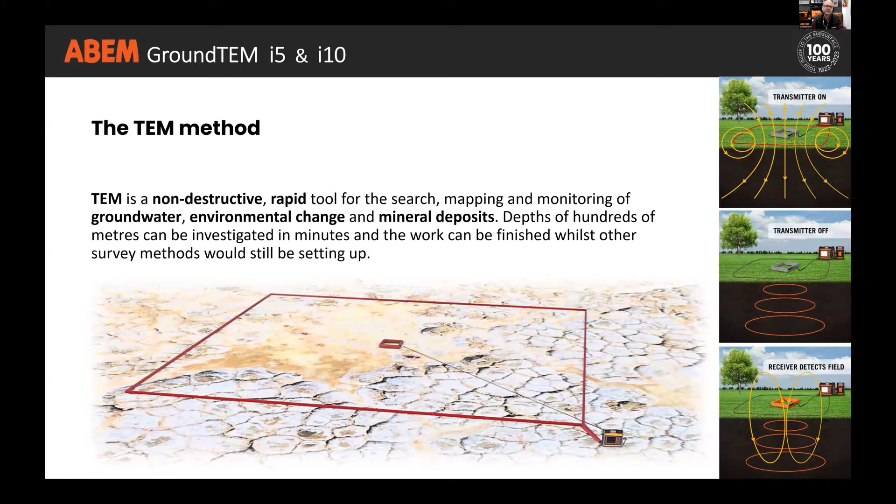So productivity is where TEM really stretches its legs, as well as its ability to map conductive bodies very well. When you're collecting 1D data, i.e. getting a model of resistivity against depth, there are quite a few limitations in that method and assumptions we have to make about what's happening in the subsurface around us. So if we can do more 1D soundings in a given time frame, we'll have a better picture of what is really happening with the geology and hydrology beneath our feet.

All TEM systems primarily consist of some way of transmitting, some way of receiving, and an instrument to record the signals. With the center loop configuration that we use on the WalkTEM 2 and on the GroundTEM, we have a transmitter loop around the outside, a receiver coil at the center, and the instrument generates a signal to go around the transmitter loop and records the responses that come back through that receiver coil.

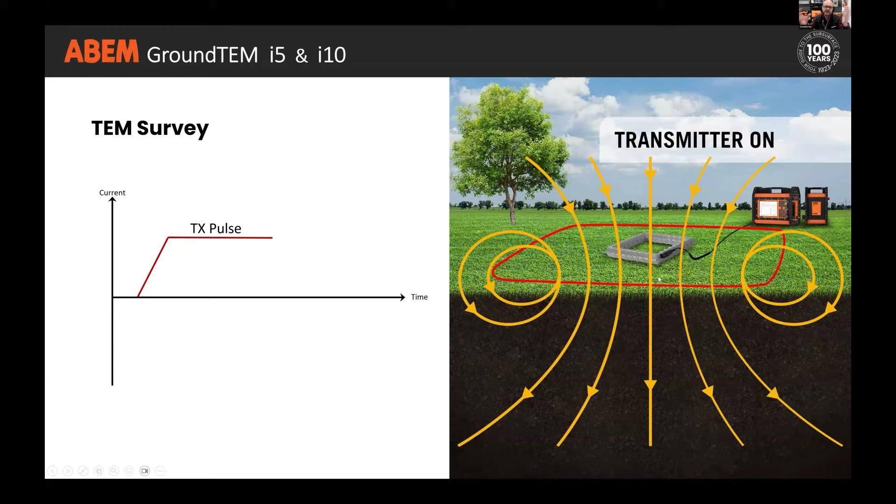What we do with the system is run current into the transmitter loop. We switch current on and wait for it to stabilize, and then leave it in that stable state for a short period of time. Physics textbooks tell us a wire carrying a current will generate a magnetic field around it - that's what we're trying to represent here. Red is the transmitter loop carrying the constant current, and yellow is the magnetic field that has been generated around it. We then switch the current off incredibly quickly, and that magnetic field collapses.

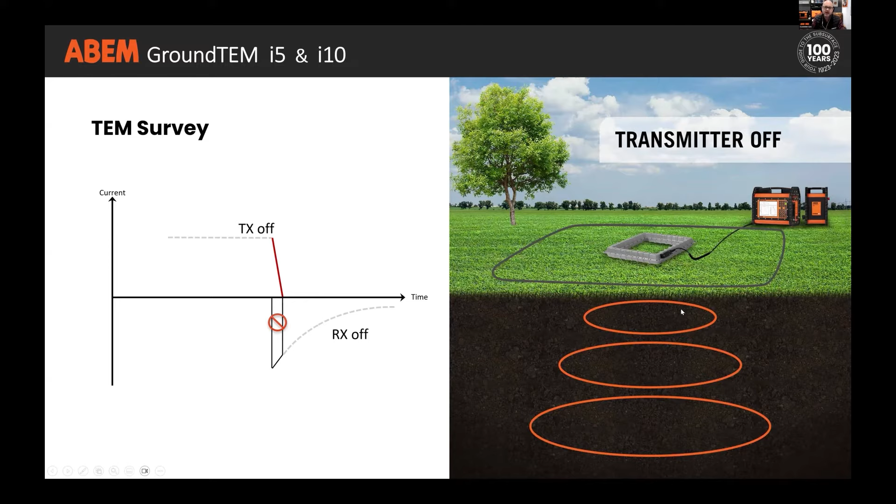As it's collapsing, it generates eddy currents directly beneath the transmitter loop, and these eddy currents spread out and downwards - a bit like smoke rings into the ground. Because they are a flow of current, they are also generating magnetic fields, and it is those magnetic fields that our receiver coil back at the surface is picking up. As the eddy currents, the transient, get deeper into the ground, the secondary field becomes weaker, and it is that decay that we map. The way it decays tells us something about the conductivity, the resistivity of the ground beneath us.

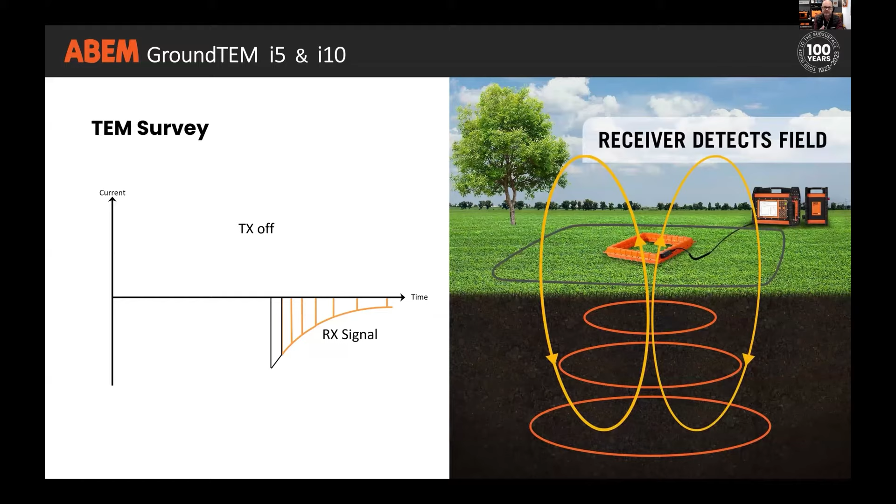So we take that decay curve and convert it into an apparent resistivity curve - apparent resistivity on the y-axis and time after switch-off along the x-axis. We then take that raw data, put it into inversion software, and the inversion software will try to generate a model of resistivity against depth that would produce the same raw data if we repeated the survey over that model. Once we've got that model, we can make our interpretation.

Our interpretation could be absolute - we identify a resistivity value and assign some kind of material interpretation to it based on that value - or it could be a relative interpretation. We look for where the resistivity drops in a given geological unit, and use that as an indicator of the presence of water. Then we might look for where the resistivity drops again as an indicator of that water becoming less fresh and more saline.

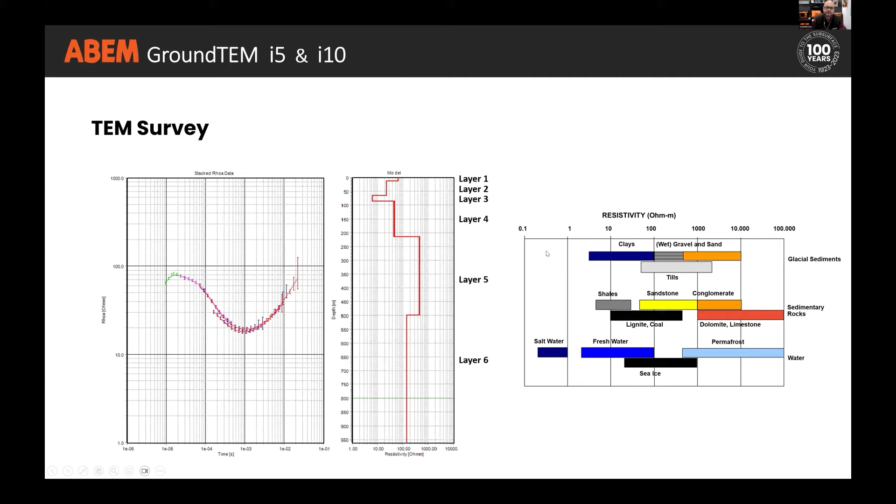We can fine-tune the system by changing the configuration to either be better at mapping stuff that is near the surface, or to be able to reach greater depths.

If we use a larger transmitter loop, we will generate a bigger initial pulse, a bigger primary signal. And if we have a bigger primary signal for a given geology, that transient, those eddy currents, should travel further into the ground before we lose them into the environmental noise that is all around us.

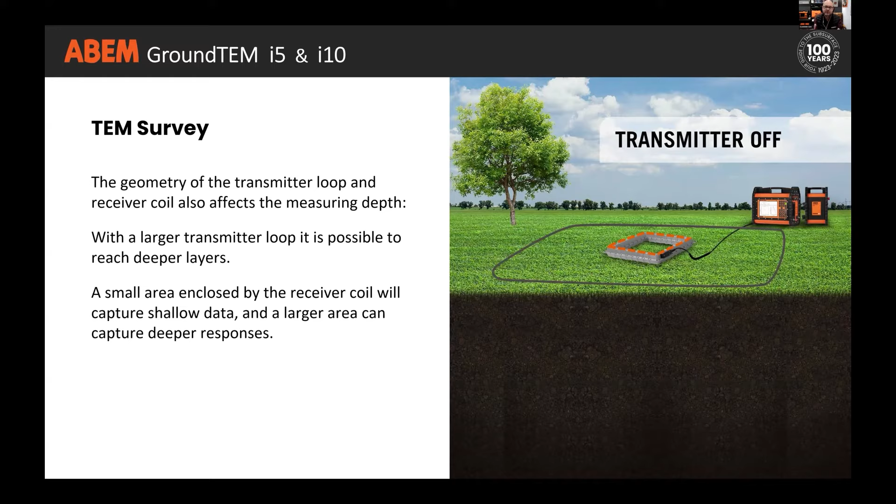With the receiver coils, if we have a very small coil, it will respond very quickly to fast changing signals, but it will lose its ability to record the signal much more quickly. Whereas a larger receiver coil will be able to scoop up more of that secondary signal and therefore have a better signal to noise ratio, be able to map that transient further into the ground, but it won't be able to respond to fast changes.

Now, when we first generate those eddy currents, they are moving very quickly, and the secondary field is changing very quickly. So we want a coil that can respond well, but at the same time we want to be able to map it as deeply as we can. So there is always a compromise, and that's nothing new in geophysics. Pretty much every geophysical method has some kind of compromise associated with it, normally to do with: do I want resolution, or do I want depth?

Now, the other thing that we can do, and we talked about this as being the difference between the GroundTEM i5 and the i10, is we can put a different amount of current into the loop. More current will allow us to create a bigger primary signal and therefore allow those transients to move further into the ground before we lose them into the noise.

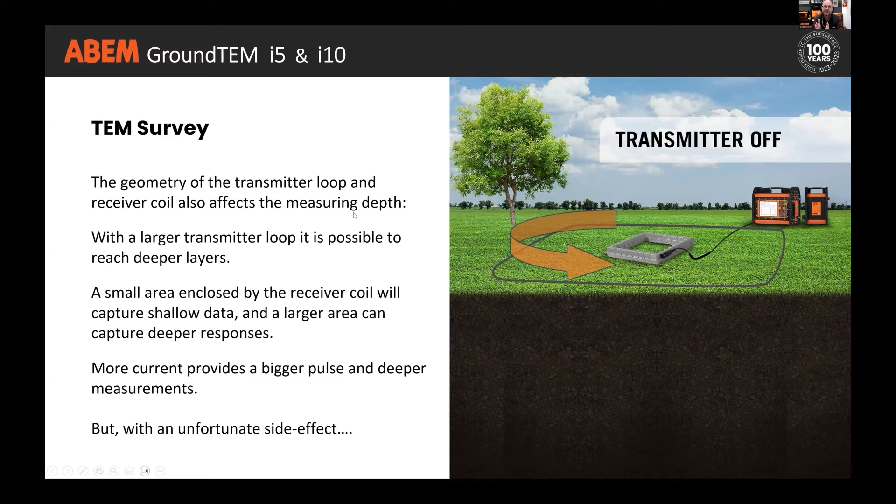But that does come with one unfortunate side effect, and that is to do with how quickly we can begin a measurement after we switch the current off.

So ideally, we would just pump as much current through the transmitter loop as we have available to us, and then start recording the secondary signals coming back from the ground. But we can't begin the recording process until all of the current has disappeared from the loop.

So here's the current coming on, stabilizing, and then being switched off. If we put more current into the loop, it takes longer to get all of that current back out of the loop. And that means we lose information about the near surface, because that transient has already traversed part of the subsurface before we begin to measure the decay.

So the obvious answer is, well, use a lower current, and then you'll be able to remove it from the loop quicker and start recording sooner. But then we have the problem that we are losing that secondary signal, that transient, into the background noise much more quickly.

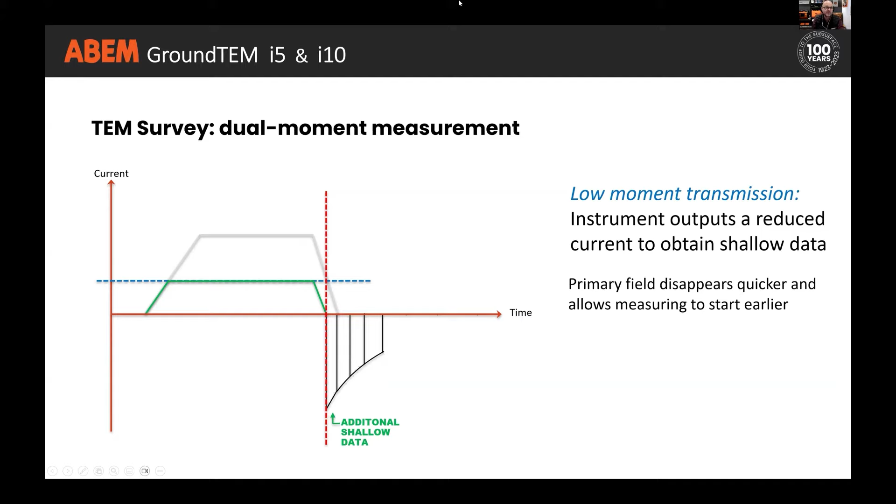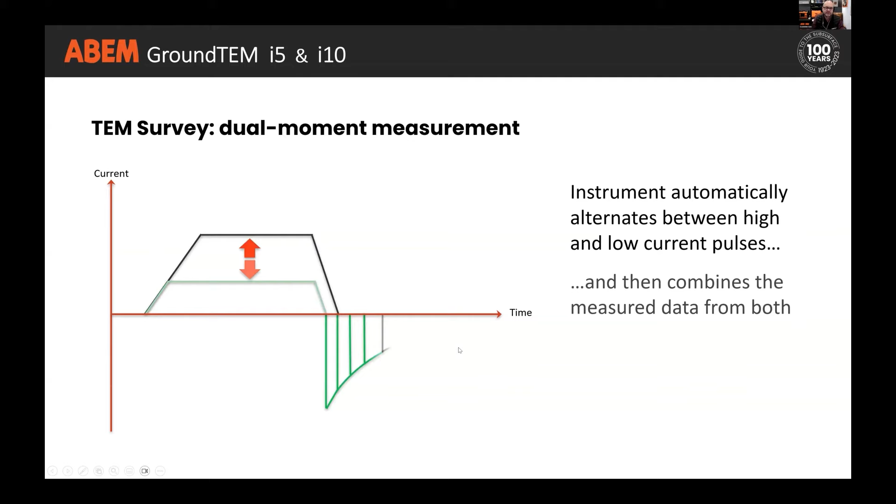So that's where the concept of dual moment comes in. Dual moment means that we are putting in both high current and low current pulses into the loop and recording those together to basically create one data file, which uses the low current, the low moment, for the near surface detail, and the high current, high moment measurement for the data from depth. And then we just end up with a single data file at the end that we can take forward for the inversion.

So the instrument will pulse a series of low current, low moment pulses through the transmitter loop and then record in the off times. Then it will do the same with high current pulses and record in the off times there. Dual moment is a feature that we have on all of the WalkTEM instruments and also the two GroundTEM instruments. So you get the best of both worlds.

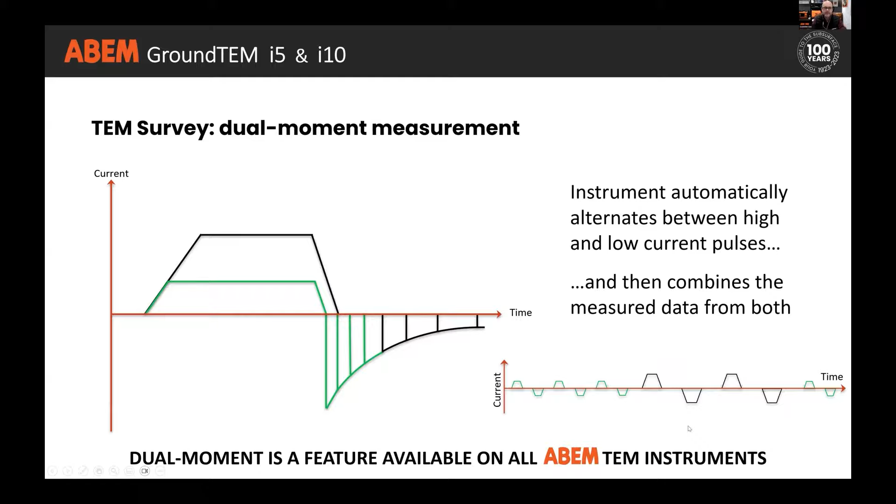So that's theory over and done with, and we'll move back to looking at the GroundTEM i5 and i10 instruments.

So the i series, it's a user-friendly, app-controlled instrument. It's a one-box solution, and it's particularly lightweight. The instrument itself, even with the batteries in, weighs only about 6 kilos. This allows us to undertake TEM surveys that are more affordable, at a lower price point than the WalkTEM 2. Less complex - the app is very simple to use, and you'll see that towards the end of the presentation when I give you a run through of how we would do a measurement - and also very quick to deploy. It's very easy to get this equipment into the field. So we're trying to make TEM more affordable, less complex, and quicker to deploy.

As we said, we have the i5, which really is only entry level in terms of its investment costs and the fact that it's only a 5 amp output. And then we move up to the i10 with more current, and then we can get into the WalkTEM 2 range.

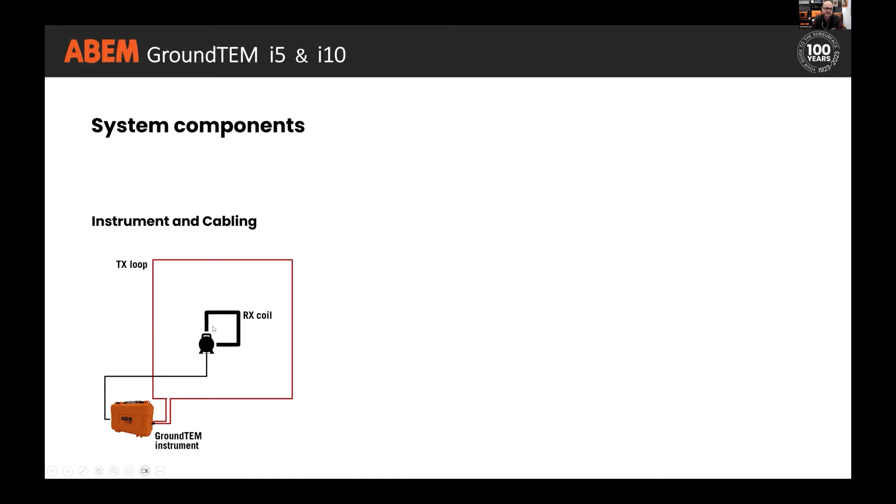We then have the transport case, and inside that transport case, we can fit the TX loop, the RX coil, plus the lead-in, the instrument, and the battery charger. And if we were shipping this on an airplane with us, we would be taking the batteries and sticking those in our hand luggage. So that's the entire system in one big box.

The only other thing that we would also require is some kind of processing software in order for us to be able to go from that raw data to the resistivity model, the bit that gives us the value. And we would normally recommend to use Aarhus SPIA and optionally Aarhus Workbench, but we'll look in more detail at those a little bit later.

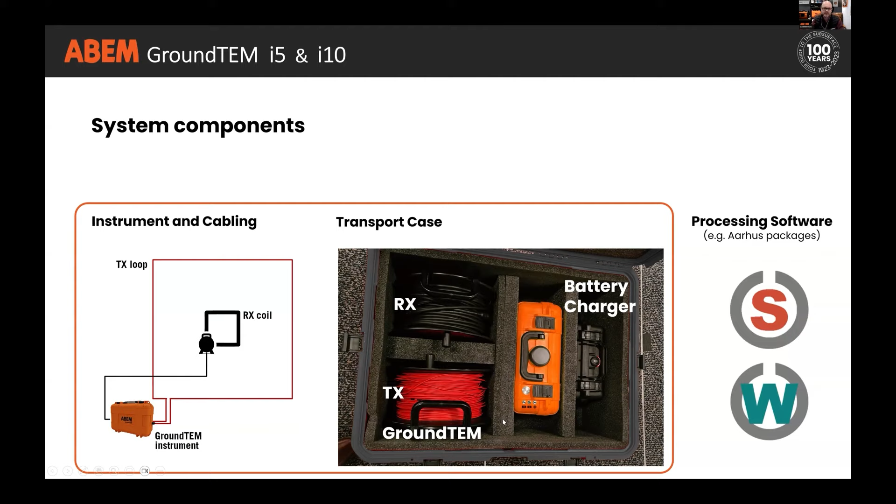Everything in the orange box is included in the price of the system. So it's one price for the i5 and one price for the i10, and that includes receiver coils, transmitter loops, instruments, charger, batteries, and the big transport case.

So if you were to come to buy a GroundTEM, your first choice to make is, do you want the 5 amp or the 10 amp instrument? And that would be based primarily on the depth that you need to get to, but it may be that you want to split the investment in your GroundTEM instrument over time. So you could start with the i5 if it provided great enough depth for your immediate requirements, and then at a later date, you could upgrade to the i10.

We can do upgrades remotely from i5 to i10 in the same way that we can do remote upgrades on the WalkTEM 2 and the Terrameter LS 2. No need for the instrument to be shipped back to us. We can just update the license that's on the instrument, and you would then have access to the 10 amp output. So first would be the choice of instrument.

There is at present only one receiver coil, so that's an easy choice to make. And then you can choose whether you want the 20x20 or the 40x40 transmitter loop. Obviously, the 20x20 is that little bit more portable, whereas the 40x40 gives us that little bit of extra depth capability. The 20x20 arguably gives you a little bit better resolution of the near surface.

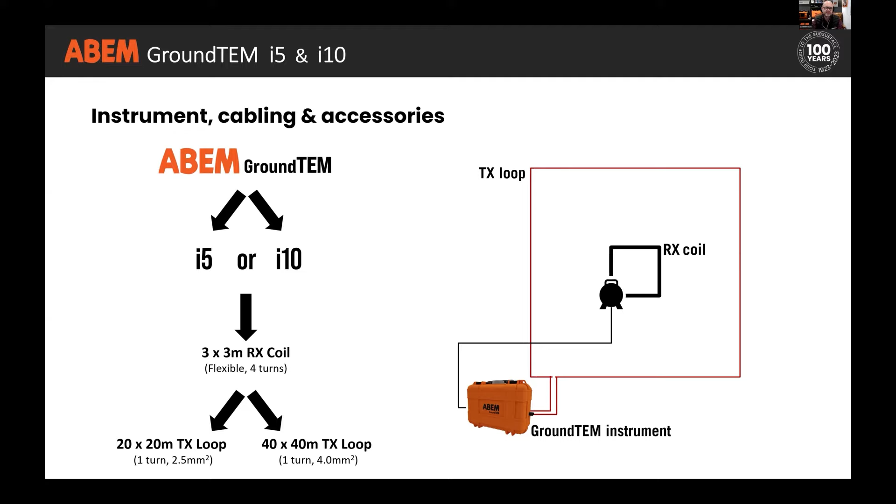Once you've defined your system that you're purchasing, then you have the choice of some accessories. So you could add the other loop, either the 20 by 20 or the 40 by 40, to give you more options, more flexibility.

A spare set of batteries for the instrument is always a good idea. Although we said that that pair of batteries should be good for about a day's work, we know that sometimes it can be difficult to be able to recharge batteries when you're in the field, so a second set might be useful. And we also know that lithium-ion batteries in cold weather have a reduced capacity, so again, perhaps having a second set of batteries would be a wise investment.

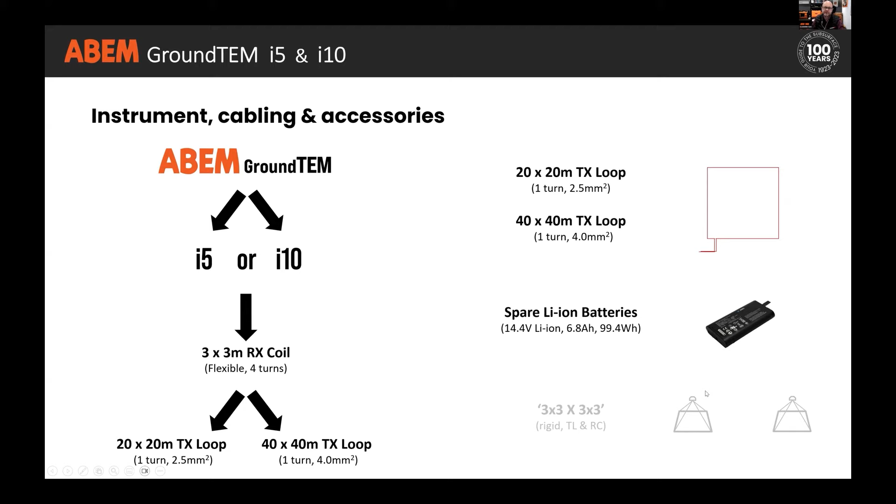We also have in the pipeline the option of a profiling set of antennas. This is a 3x3 transmitter coil and a 3x3 receiver coil that are semi-rigid with handles at the top, and the idea being that two people could then move this in tandem across the landscape, place it down, start the measurement, take a sounding, and pick the whole lot up and move to the next location. It would be far more efficient than laying out a loop at each sounding position. You'd pick it up and move along, and should be able to achieve kilometers of survey a day. This would also allow profiling in a region where a towed TEM system just wouldn't be viable. That's coming later in the year, so keep your eyes out for a news release about that.

Software options for the system. The first one's pretty obvious: the controller app, the GroundTEM app. This is for setting up the instrument and initiating measurements, and we'll have a look at this in a short while. At present it's available on our website for download. It will be available in the Play Store in the future, as well as the iOS version, which is also following.

It's very easy to use. You start the instrument, which has a Wi-Fi hotspot within it. You connect your device to that Wi-Fi hotspot. You then choose the script, which is really just based on the loop size you're using, and then define how long you want to run the measurement for. There's no having to choose how many times it stacks—just say how long you want the instrument to run for, and press play, and off it goes.

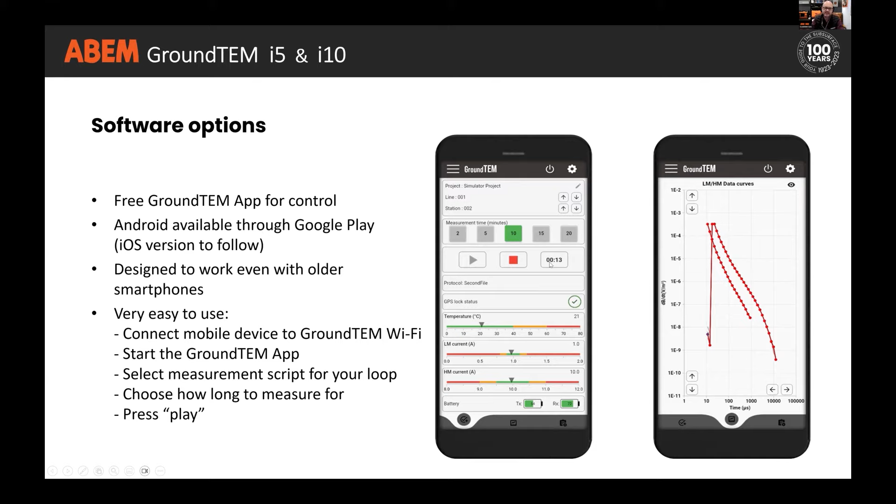If you decide you want to stop the measurement earlier because the data are coming in very nice and clean, like this example here, you can press stop at any time, and that data file will then be closed off and saved at that point. You don't need to sit there for the entire duration you've chosen. It also allows the option for adding field notes, or if there's anything unusual about the site you're working on, or you see something in the data you want to have a closer look at later, you can put a quick note into the app, and that will be stored in the project folder.

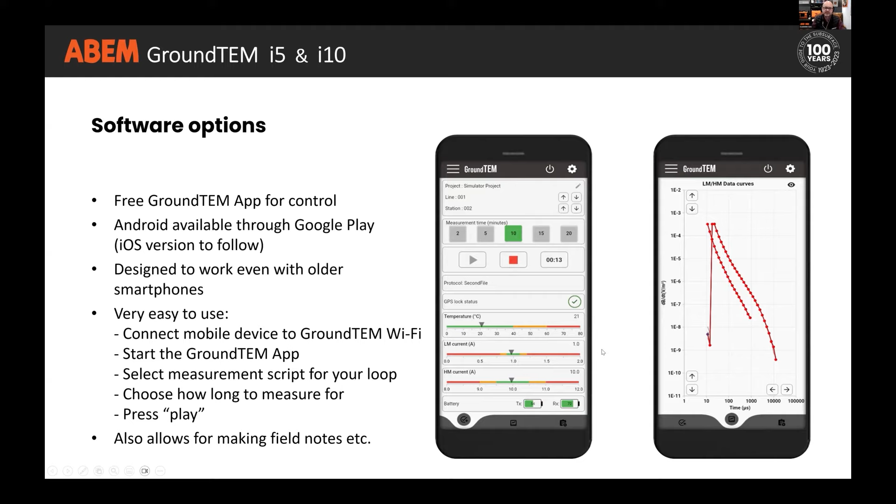Then we have the post-processing software. Obviously these are not included in the price of the system, so you can choose any post-processing software you wish, but we would normally recommend using Aarhus SPIA TEM to generate the 1D models—going from our raw decay curves to a usable resistivity model. It's a very easy to use package, and it allows us to output images of the models, images of the raw data, the model curves. It also allows us to very easily make one-page PDF reports that just have the model, the decay, the raw data and the model curve, header information about the measurement, plus a tabulated set of results for that resistivity model. We can also export that table in an Excel CSV type format if we want to import it into something else.

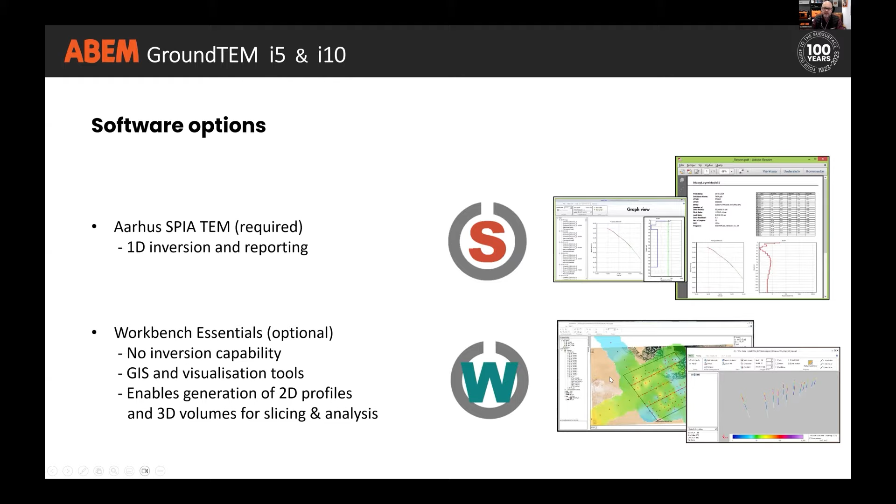Optionally, we might want to add Workbench. Workbench allows us to take those individual 1D models and do a bit more with them. We can combine them with base mapping, or with other geophysical data plots. We can also generate either 2D profiles through a series of 1D soundings, or a 3D block of resistivity data that we can then cut in any orientation. As we see here, there's a resistivity slice generated at a given depth, showing the resistivity variation across the landscape. So a very powerful add-on to the SPIA TEM software.

But how do we make sure we're getting the right TEM system for our requirements? Well, we now have this larger lineup. In summary, the GroundTEM is the affordable TEM solution in our lineup. If budgets are limited, or if you're new to TEM and don't want to initially invest in a full-blown WalkTEM 2, then the GroundTEM is a very good choice and provides good surveys to depths beyond 200 meters. It is the most portable system we offer. So if you're having to do surveys in regions where it's important to get in and out very quickly, or areas that are particularly inaccessible, like dense jungle or high plateaus where the climb up might be quite difficult, then the GroundTEM is a good choice.

So we have our picture of our intrepid explorer here. In that picture, I have everything I need to do a 20 by 20 TEM measurement with the GroundTEM—that's the 20 by 20 transmitter loop in my hand, and in the bag I have the instrument, the batteries, the receiver coil, and the lead-in for the receiver. So very easy to get into the field with this system.

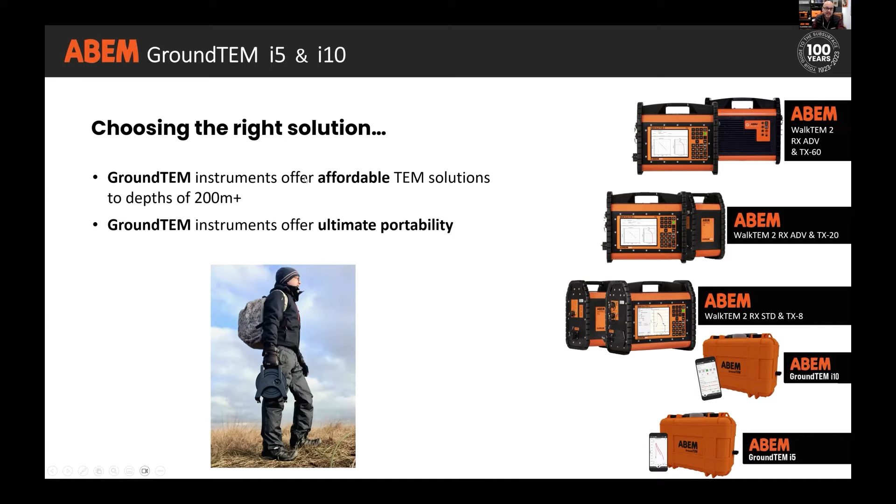It's also very simple to use, and as I said before, we always prided ourselves on the fact that the WalkTEM and the WalkTEM 2 were pretty easy TEM systems to learn to use. You could train someone to go out and actually collect data pretty quickly on those systems. They're not particularly overwhelming in the way that they're set up. Nice workflow, but the GroundTEM takes this another step into an even easier way to deploy these systems and be able to collect that good quality data. There really shouldn't be a barrier to you being able to send people out and come home with good quality usable TEM data.

If, however, you think that your requirements might change in the future, maybe you might get involved with a survey that requires either greater depth or a wider range of loops, then the WalkTEM 2 is a good choice. You can expand the receiver from the standard to the advanced. It gives you things like onboard processing, and the Rogowski coil for testing different damping resistors. It also allows you to run with the full suite of transmitters from the 8 to the 20 to the 60 amp versions, and all of the different transmitter loop and receiver coils. That mixture of transmitters, receiver coils, and transmitter loops gives you a lot of flexibility in terms of how the system can be set up for a particular project.

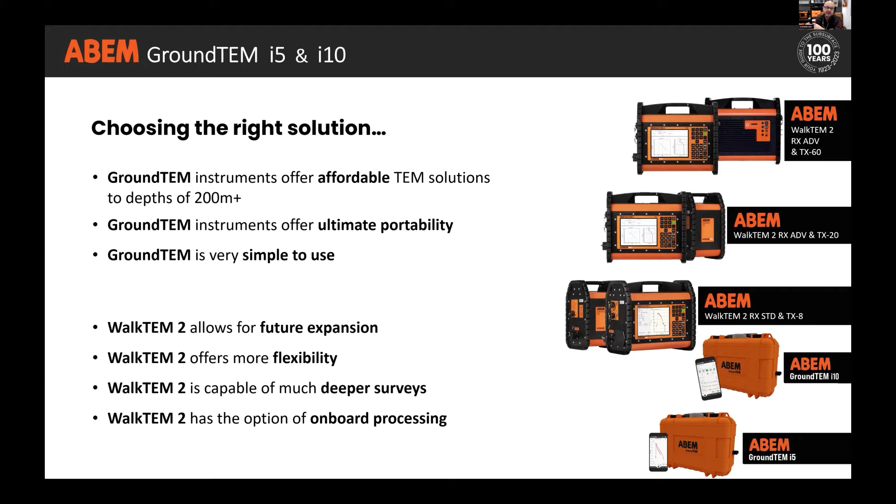So to round off the look at the instrument, before we move on to a data example, I'll quickly run through the survey procedure with a GroundTEM instrument. Here's our intrepid explorer again on his way out to the field with the hardware.

The first thing we're going to do is lay out our transmitter loop. The transmitter loop is just a single length of wire, and a little bit different from the WalkTEM 2, it has the lead-in cable built into it. The lead-in is a short length of cable that allows us to remove the transmitter and receiver some distance away so the loops can be offset slightly. So with this, it's all in a single run. We have double markers to show us when we get to the first corner of our square. So we would leave one connector by the instrument, pull the cable out until we get to a double marker.

Then we just peg that plastic peg as our first corner. We run around the square, and it doesn't matter which way we go, the transmitter loop is completely reversible, we can plug it in either way round. We run around the square until we get to the next marker, turn through 90 degrees, then run to the next marker, and back to the start. When we get to the last double marker, that's the point at which we've started, and we then have the lead out back to the instrument.

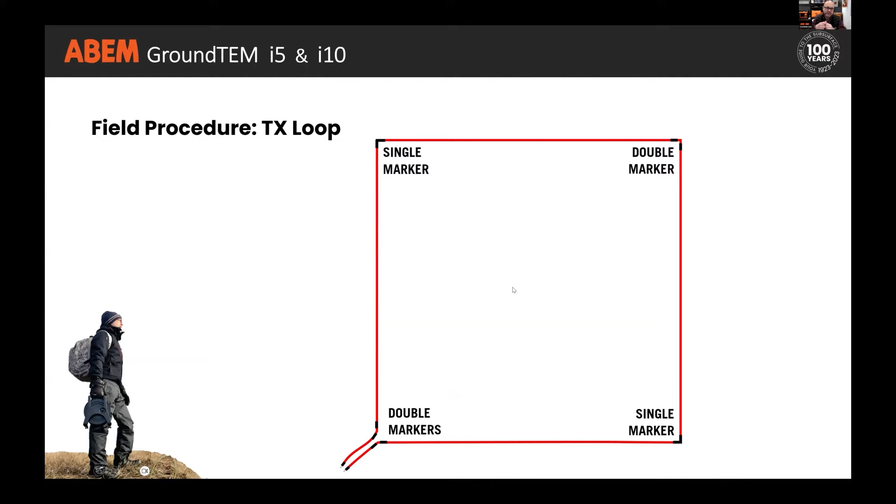Once we've laid out the transmitter loop, the next thing we need to do is put the receiver coil in the center. But how do we know where the center is? Well, we take the lead-in part of the receiver coil and lay the end of that lead-in cable by the instrument and unreel it until we get to a double marker.

So you'll start to see now why there's a mixture of double markers and single markers on the transmitter loop. Hold that first double marker on the lead-in where we have the double markers on the transmitter loop, and then we walk towards the location of the other double marker. So we keep all the double markers together. When we get to the end of the lead-in cable, we will then be in the right position to lay out the receiver coil.

So the lead-in is specific to the size of the transmitter loop. There is a lead-in for the 20 by 20 and there's a lead-in for the 40 by 40.

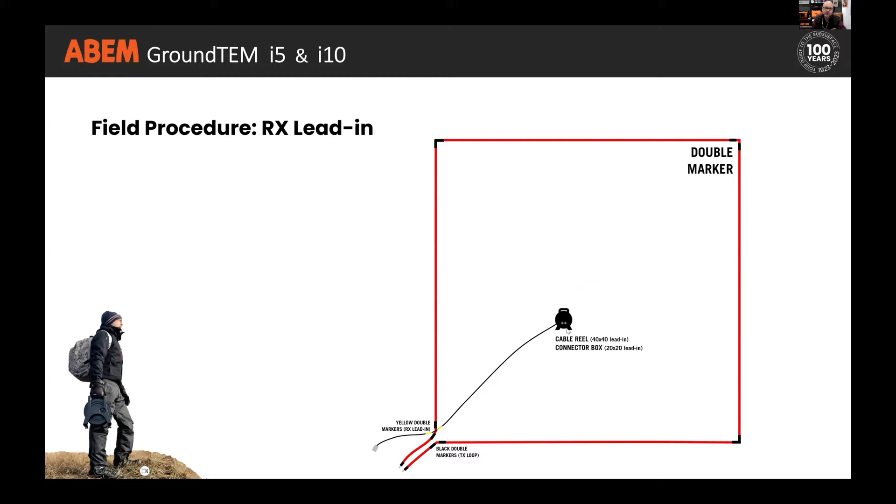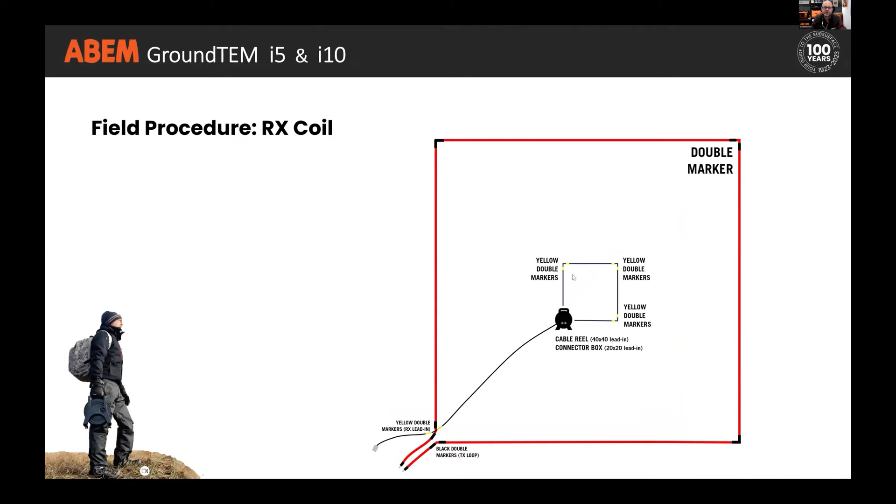So once we've got that lead-in in place, then it's very easy to lay out our 3 by 3 flexible, and that has double markers on the corners again, so we know where to pull out to create the square, and that just plugs straight in to the end of the lead-in. And then that is our layout done.

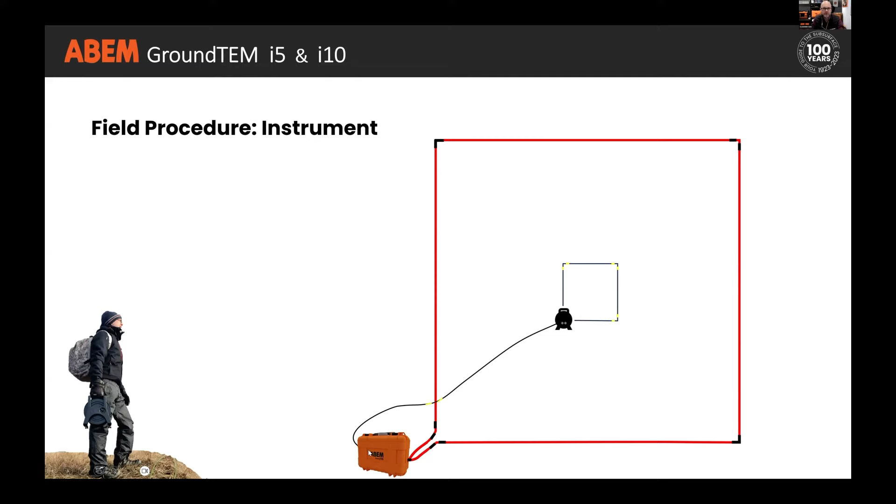So all that's required then is to put the instrument at the corner, plug the transmitter loop in, plug the receiver coil in, switch the instrument on, and then we can move over to the app. So I will try and show the app in real time.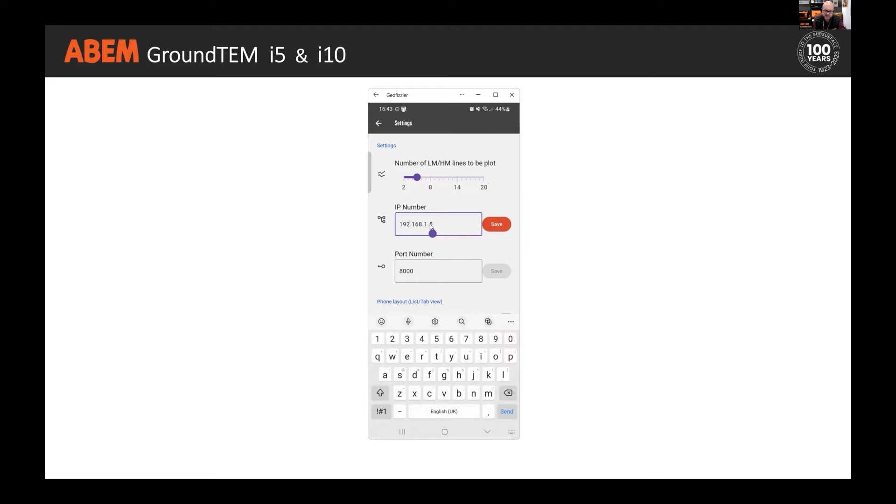So we can take that value and put it into the settings on the app. Now this is the regular production instrument IP address, it's the same for all of them, but I'm actually using a simulator because I'm not outside. So I will just put in a different address, which is the address of my simulator on the PC. Come back out, and then I'll just refresh the screen and we should connect through.

So when we're connected to the instrument, this is what we'll see on the screen. And to begin a measurement, all we would need to do is select a protocol.

And if we forget to do that and try and start the measurement, it'll tell us that we need to do that. In here on a regular instrument, it would give us a choice of 20 by 20 or 40 by 40 meter measurement. In here, I have a protocol for the simulator.

Then we assign the project a name. So we will call this demo, save.

And then we have both survey lines and station numbers. So stations are the individual soundings, and we can tell the software that we are aligning those in a single line, and then we can add a second survey line or a third survey line, just to help us manage our data sets as we're collecting them in the field.

Then we choose how long we want the measurement to take. So I'll just say 1 minute for now, just in the interests of speed. And all we need to do is press play.

Then what we see at the bottom is the status of the instrument. So it is telling us that it has a lock, so we've got a GPS position for the sounding. It'll tell us how hot it is inside the box, so we can monitor that to make sure nothing is getting too high, too close to the red.

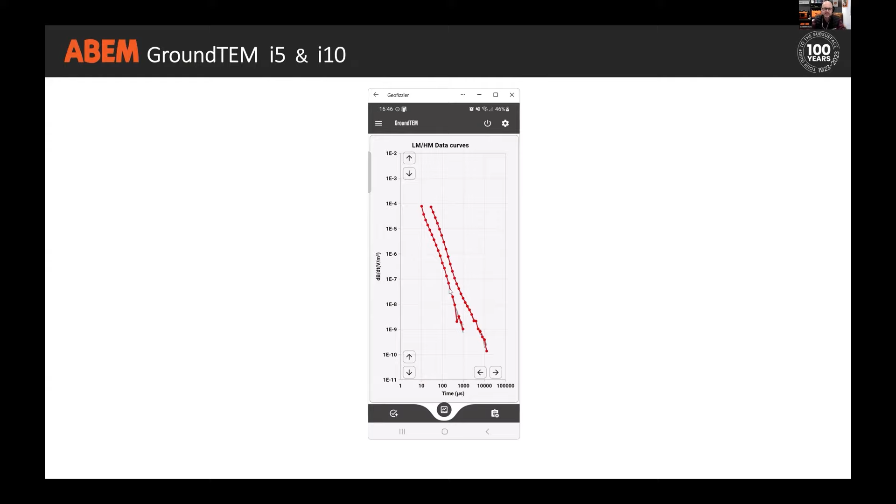That would indicate we're collecting pretty good data. The final tab gives us what I call the nerd box. There's additional information here about temperature of the different elements of the instrument, the exact output currents for the low and high moment, the voltage left on both the transmitter and receiver batteries, and also our live GPS position.

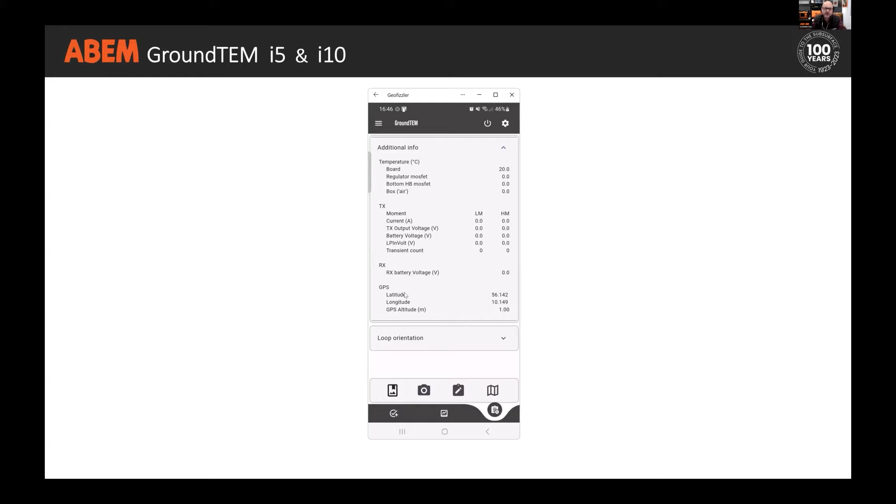We also have a neat option to define the loop orientation. Our instrument is in the corner, and that's where the GPS signal is being collected from, but we can tell the system where the center of the loop is. To make it easier, if you press the help button, it gives you a quick diagram to show what to do.

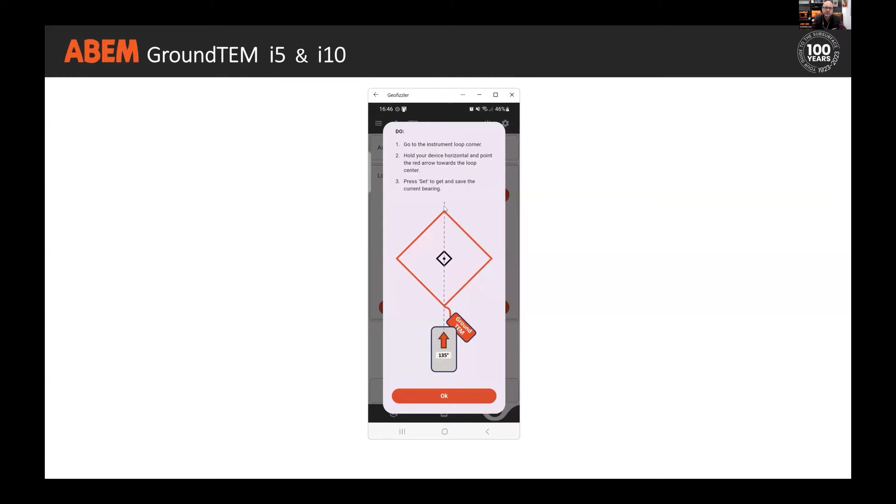So you stand by the instrument, point your mobile device towards the center of the loop, and then press set. As I turn my phone around, you should see the heading changes, and when I'm pointing towards the center of the loop, I just press set and it writes it in here. If my device doesn't have a compass, I can press edit and type in a manual figure there instead.

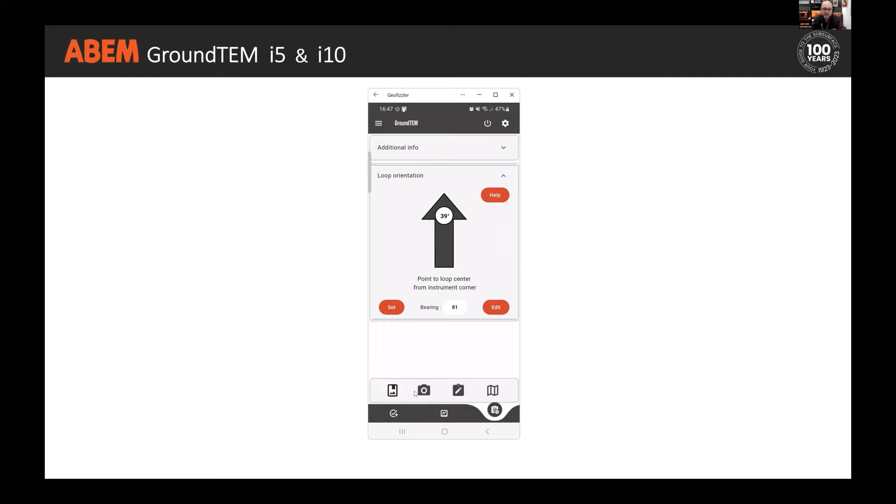Field notes can be added down here if there's anything unusual about the site, and those will also be stored in the project folder. That's pretty much it — one measurement done. We could now move on to our next station, define how long we want to measure for at that location, press play, and off we go again. So really simple to use, nothing complex, no big settings to work through. The system has been designed to make a really straightforward workflow, from setting that box down to having a box full of usable TEM soundings.

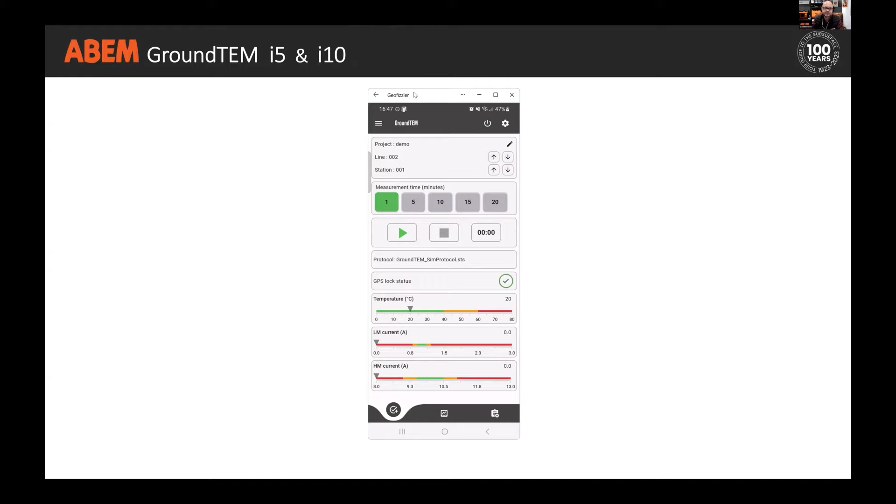Once we've collected our data, we'd want to get it off the instrument. Everything is stored on the GroundTEM in the orange box, not on the phone. One reason for that is so you can use a very basic mobile device and not have to buy a brand new phone to run the instrument.

So we have the GroundTEM Connect software, which I should have opened before. Oh, help if I could spell GroundTEM. There we go.

This is just a very simple tool whereby we connect our PC to the GroundTEM Wi-Fi network. Here it is. Once we're connected to the Wi-Fi network, we just say connect to instrument. It would then read in the project folders that are on the machine, we select the ones we want, say copy, and it sends those across to our local PC.

You'd have the project folder with the raw data, the field notes, all of that information in there, and also the USF file format of the soundings — universal sounding format used by pretty much any 1D inversion software, so you can import that into your software of choice.

So just to round off, I'm going to look at some data. This data set was collected in Indonesia during a demonstration of the GroundTEM i10. It was part of a conference, and the problem with conferences is that conference hotels are rarely good locations to do a TEM sounding — there is too much infrastructure.

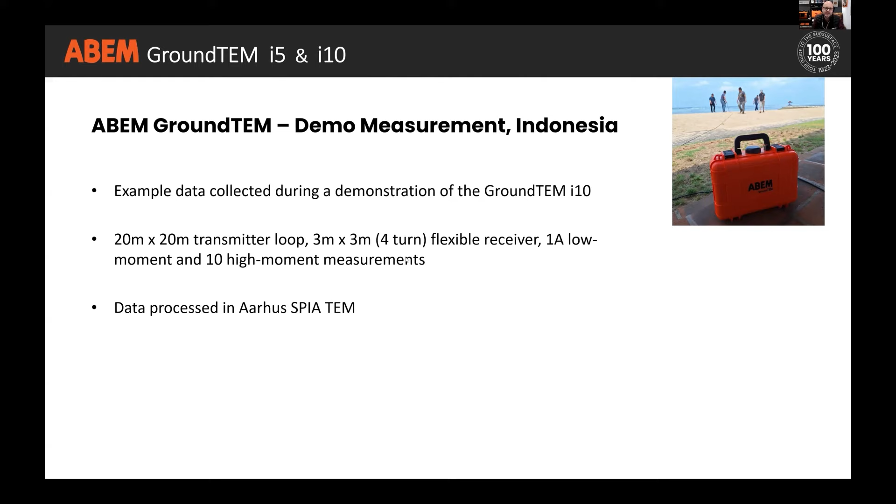So we were very lucky that there was a beach right outside the conference location. We took the loops out there and laid them at the top of the beach, just above and into the high tide region. We were using the 20 by 20 transmitter loop, the regular 3x3 flexible receiver, and with it being an i10, we were alternating 1 and 10 amp low and high moment measurements during the cycle.

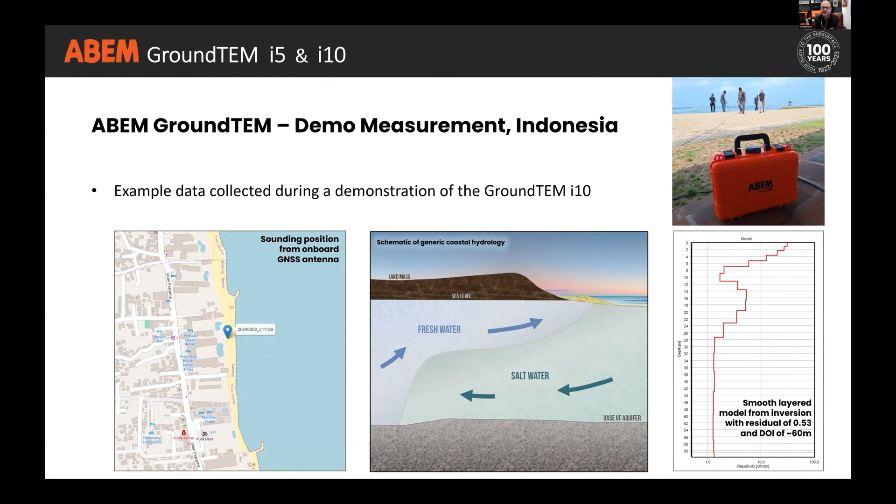This is a very generic picture of what happens with fresh and salt water: fresh water on the land side, salt water on the sea side. The salt water tends to push under the fresh water as it's denser. So could we use that very generic model of coastal hydrology to explain the resistivity values we've seen?

So if we zoom into that diagram to where we've got the beach, the fresh water, and the seawater, let's apply our resistivity model to that. So yeah, maybe we could.

The high resistivity would probably be the relatively dry sand at the surface. It was very hot here, so even after the tide has been up and retreated, the sand dries out pretty quickly. Then as we get deeper into the sand, it's starting to become saturated, and obviously the water causing the saturation is seawater, so the resistivity is going to drop considerably.

Potentially we're getting into a region where the fresh water from the land side is mixing with the seawater. It rained pretty heavily in the days and nights prior to this demo, so probably a reasonable amount of groundwater movement was happening, and that fresh, higher resistivity water mixing with the salt water pushes the resistivity up a little bit. Then when we get much deeper, we're probably into the saline aquifer, into the pure salt water underneath.

So this entire measurement, from laying out to collecting the sounding, took about 15 minutes, then another 5 minutes to pull everything in. It's then a very quick process to transfer the data off the instrument and run it through SPIA TEM, and start making a first guess at why we're seeing the resistivity model that we do.

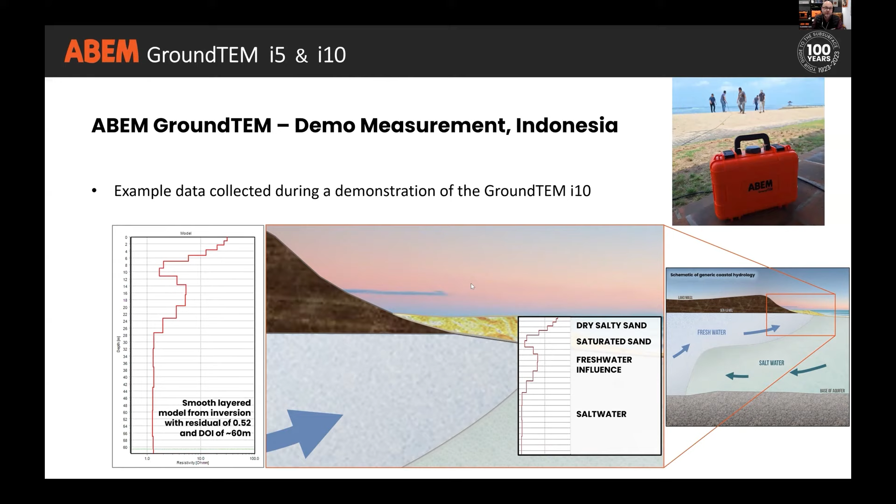Is SPIA included, or do I need to buy it separately? No, you would buy that separately. It is an additional option. Some people may already have inversion software, so they may want to use that, or you can buy it at the time. But the package itself is just the hardware.

It's not necessary that you have to have a WalkTem 2 or a GroundTEM. They sit together quite well in your geophysics storeroom—when you're doing deeper surveys, bigger campaigns, maybe you want to use the WalkTem 2. But if you've got a small project where you just need to get out, get the data collected and get back, or an area where access is particularly difficult, then the GroundTEM might be the tool of choice. So perhaps you'd have both, and in that case you probably already have processing software, and it would just be the hardware that you need.